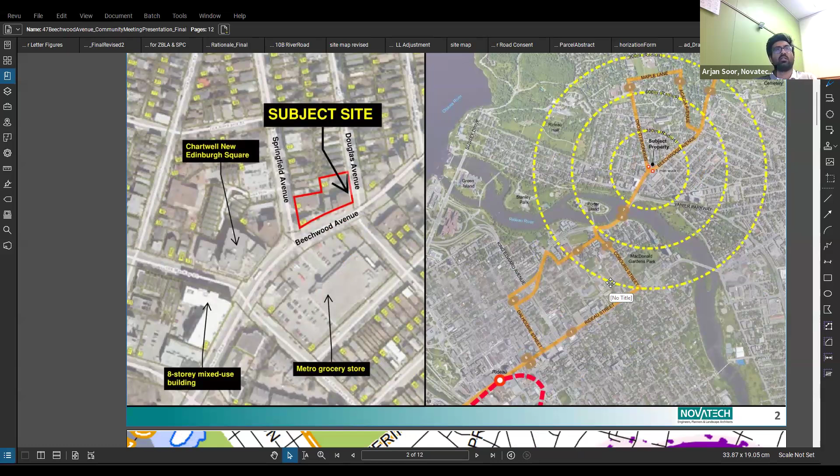To give a bit of context, the subject site is located on the north side of Beechwood Avenue, across the street from the Metro grocery store, and east of another 8-story mixed-use building on the north side of Beechwood. The subject site is currently developed with 6 different businesses, and the map shows nearby uses on the left-hand side, and the proximity of public transit service with 300, 600, and 900 meter radii on the right-hand side.

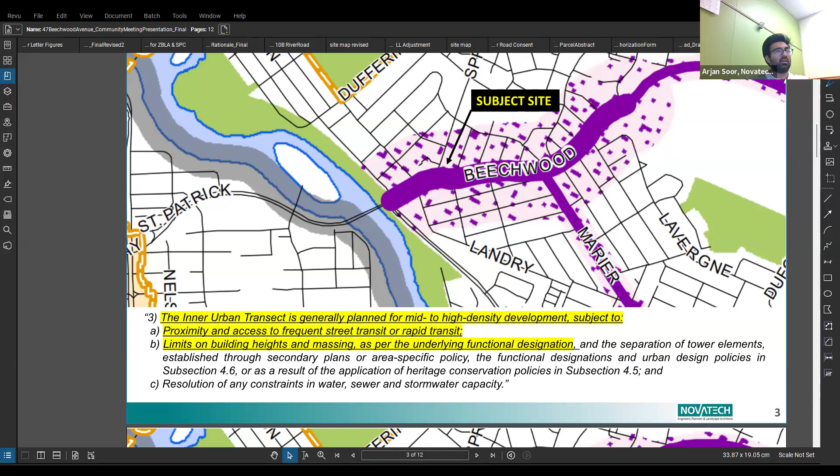The subject site is within the inner urban transect. The intended pattern of built form, site design and mix of uses in the inner urban transect is urban. Section 5.2.1, policy 3 of the official plan states that the inner urban transect is generally planned for mid to high density development, subject to proximity and access to frequent street transit or rapid transit, and limits on building heights and massing as per the underlying functional designation. The subject site is located close to frequent transit service, and the underlying designation is Main Street Corridor, which we'll discuss next.

Touching on what the official plan identifies as urban characteristics: Section 5, Table 6 identifies things like shallow front yard setbacks, principal entrances at grade with a direct relationship to the public realm, a minimum of 2 stories, buildings with minimal side yard setbacks, small formal areas of landscape including soft landscape, trees, and hard surfacing, and limited parking concealed from the street. The proposed development, as you'll see in Ryan Coolwine's presentation, exhibits many of these urban characteristics.

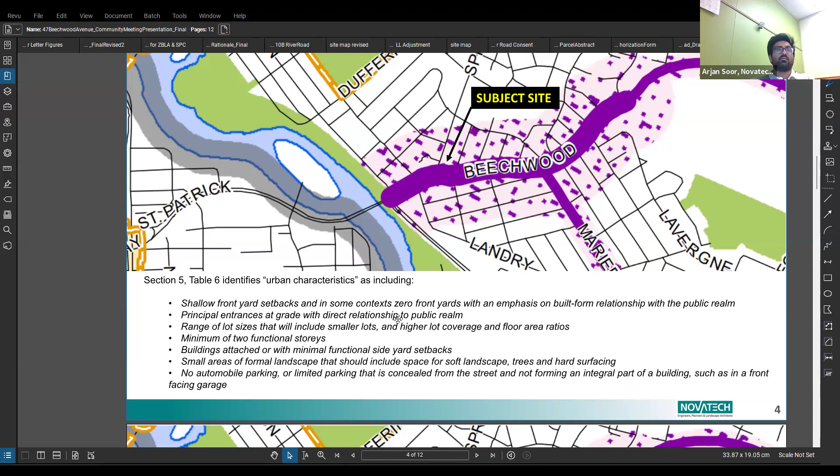The subject site is designated Main Street Corridor within the inner urban transect. Main Street corridors within the inner urban transect are areas where increased residential growth and mixed-use development is to be accommodated. Section 5.2.3, Policy 2 of the official plan states that along main streets, permitted building heights, subject to appropriate height transition, stepbacks, and angular planes, are: on sites fronting segments of streets whose right-of-way is narrower than 30 meters, generally up to 9 stories, except where a secondary plan or area-specific policy identifies different heights.

The subject site is along a portion of Beechwood that is designated Main Street corridor. The Beechwood Avenue right-of-way is less than 30 meters in width, meaning a building height of up to 9 stories is generally permitted. The proposed development of an 8-story mixed-use building clearly aligns with this direction in the official plan.

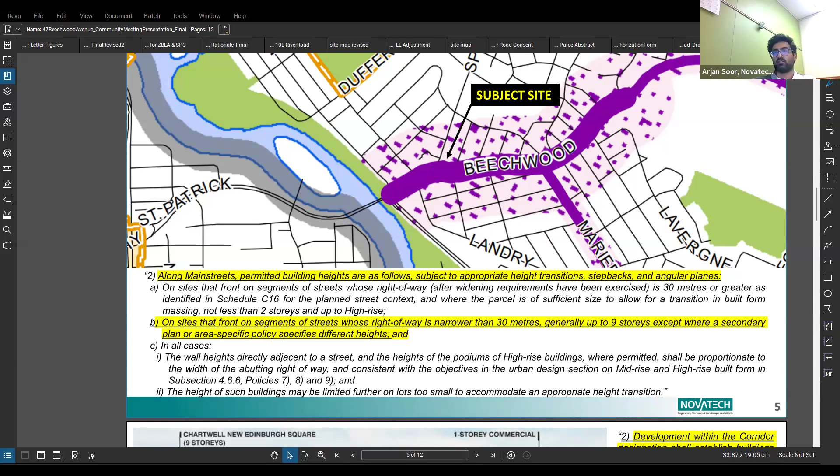The subject site, as mentioned, is designated Main Street corridor, which permits up to 9 stories. Section 6.2.1, policy 2 of the official plan states that development within a corridor designation shall establish the maximum permitted building heights and highest densities closest to the corridor, and that appropriate transitions in height, use of land, site design, and development character through the site where the corridor designation meets abutting designations shall be ensured.

Section 6.2.1, policy 3 of the official plan states that corridors will generally permit residential uses and non-residential uses that integrate with a dense mixed-use urban environment. As Ryan Coolwine will explain in his presentation, this development provides a transition between the taller buildings to the west and low-rise buildings to the east along Beechwood Avenue. An adequate transition is also provided from the properties to the north, which are subject to the evolving neighborhoods overlay.

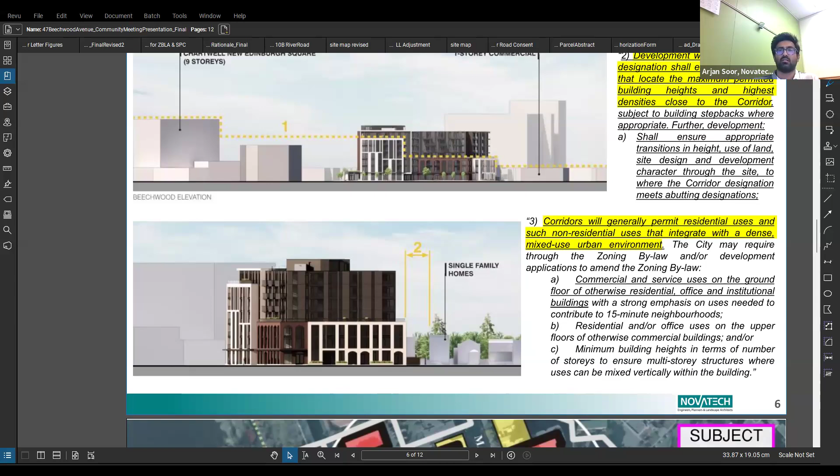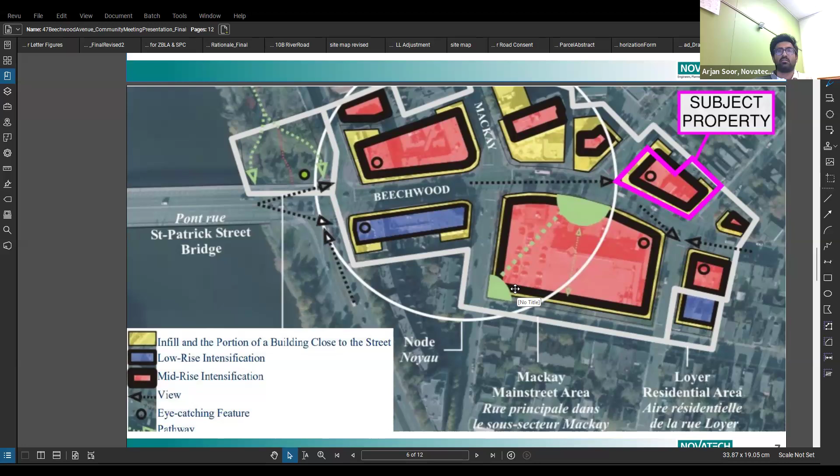What I want to emphasize is that the project conforms to the official plan and is designed to align with the policy context I've set out for the subject site. The property is designated Main Street corridor within the inner urban transect. The official plan anticipates the site would be developed with a mixed-use mid-rise building of up to 9 stories exhibiting urban characteristics. As Ryan's presentation will demonstrate, that is exactly what the proposed development does, aligning with the policy direction of the official plan.

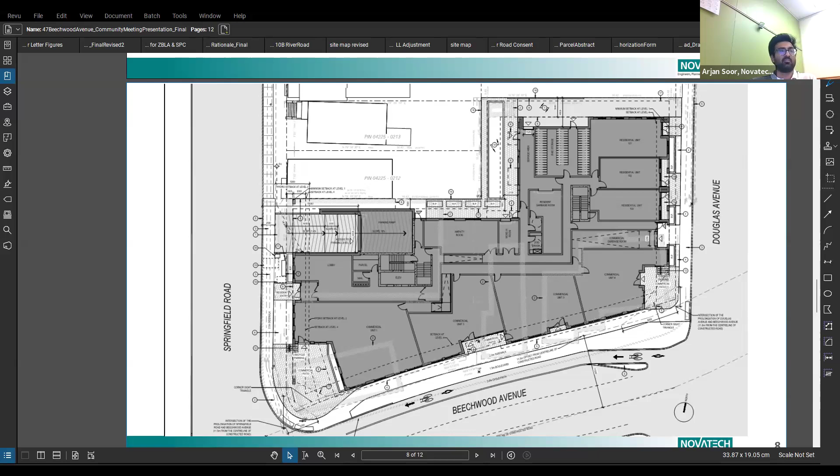So I want to pass it on to Ryan now, so I'll stop sharing.

All right, my turn. Can everybody see my screen okay? I don't see anything. Now? It's loading, but yeah, there you go. Okay, awesome. Thank you for that, Arjan.

There's a great deal of complexity with this site, and this is a project we were very excited to work on. There's a culmination of intersections and different levels of complexity that come together with a project. Basically, everything that could be complex is complex with this project, and we check every box possible. We like difficult challenges, so this really resonates with us.

We do a lot of infill work and we're specialists with multi-unit residential. We believe deeply in the positive influence that design can have, not only on the people who live in these projects, but also the surrounding communities, and we take this responsibility very seriously as design professionals. This project is of particular relevance to me because I'm actually a resident of the ward, a Manor Park resident, so I know this neighborhood very well.

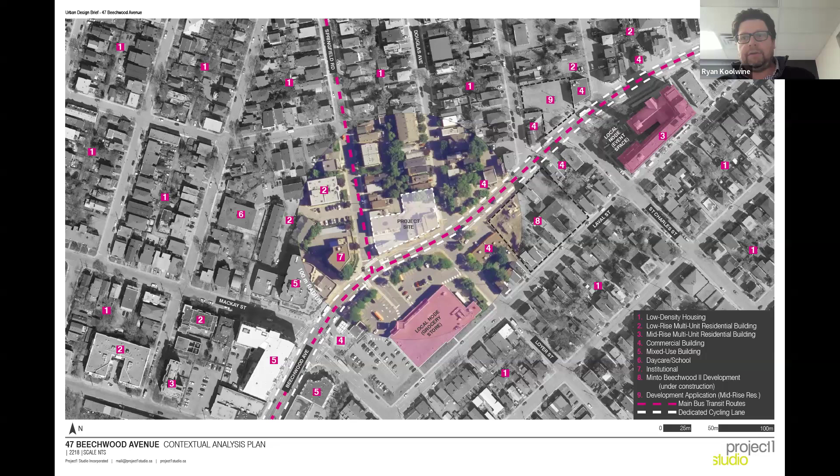When we look at the site, we see the number of recent developments that have been completed: St. Charles Market, 88 Beechwood that's recently been completed, Claridge's project that may happen at some point, and we've already completed a low-rise building at 4 Champlain. We're well aware of the trend, the energy, and the momentum being built for the neighborhood, so having the opportunity to work on this site was extremely interesting for us.

We do need to take stock of what's there right now. The positives are that we have thriving businesses that contribute quite nicely to the community, but they're housed in structures nearing the end of their functional life cycle. While the presence of what they offer as an asset to the community is great, what they do in terms of urban design and the public realm is actually quite detrimental to the neighborhood. Buildings set very close to corners aren't about pedestrians or circulation space and can't be celebrated, but are about negotiating very tight corners that have safety concerns.

When we look at the existing storefronts that we've got, these are stairs and buildings that are in various states of repair, that are inaccessible. We've got ceiling heights in these businesses that are quite a bit below what we would consider optimal, very much suboptimal. And the general characteristic of these gaps in between buildings is surface parking.

These aren't really directed towards pedestrian use. And while I do make note of a number of these businesses making use of surface parking areas to provide outdoor space, that's a cue that we've used towards how we move forward with the project.

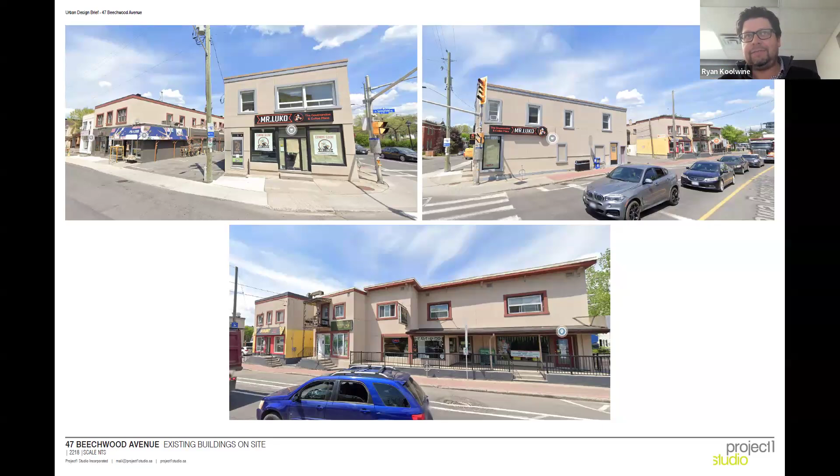But the general sense that we get as we walk past these buildings and past this part of the neighborhood is buildings that are certainly past their foreseeable lifespan, and then surrounded by areas of asphalt that aren't really geared towards engagement or the pedestrian realm.

So there is not a single building of these commercial residents that face Springfield and face Beechwood that actually meet any of the code requirements for being barrier-free accessible. And while the building on the corner here does have a ramp, that ramp is far too steep to be considered barrier-free or to providing proper barrier-free access.

And so this is another pretty big challenge here in terms of the commercial space that is being offered, is that it's being offered to the able-bodied and able-bodied alone, which isn't necessarily fair to the community at large.

The remainder of the site, as we've seen here, is occupied by surface asphalt. So these are all surface parking areas. And yes, they've been reclaimed in certain spots to act as patios, but the general nature of these areas is surface parking. And then we've got these gaps in our urban blocks, which is, again, something that we're looking to avoid when we're dealing with important areas of our streetscapes.

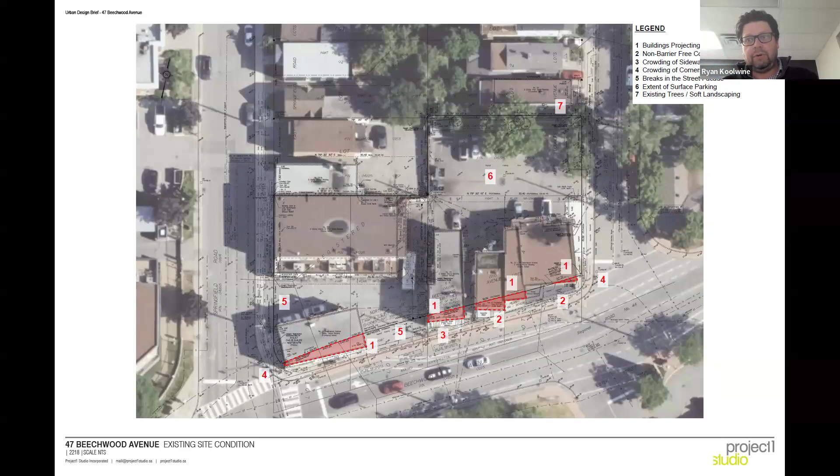There is a small area of green space at the northern boundary of the site along Douglas, and then a small portion that comes down along Douglas with a couple of trees on it. We certainly respect this, and definitely part of our plan going forward was to promote and to bring more green space into the development.

So when we analyze the site and we try to figure out what key elements are currently in the context and what elements we'd like to bring forward, it really relates to understanding the site and bringing out a bunch of ideas. So immediately we identify areas.

This is a corner that needs to be celebrated. This is a corner that needs to be given back, and we need to have some public space in this area. We really do like the cadence of the buildings that we have here.

So it's important to us too that when we're articulating the ground plan and articulating the buildings that are along Beechwood, this isn't a monolithic building. This has to be a building that has different facets, that has bumps, outs and ins, so that it kind of mimics or harkens back to the idea of a neighborhood that was comprised of a series of smaller buildings as opposed to one gigantic building that's going to be occupying the entire city block.

Also important to us here too is the connection and establishment of really well-connected cycle tracks and active modes of transportation. We have worked at length with city staff on the active modes of transportation in front of this site and trying to determine a number of different ways to get cycle tracks to be integrated into the site and work with current and constantly evolving design standards.

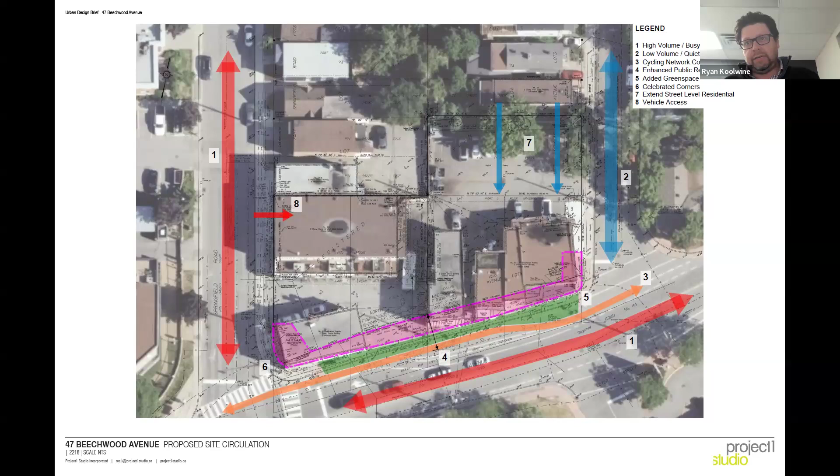When we look at the difference between these two streets, close in proximity, the character of Douglas is distinctly different from Springfield. We see businesses, commercial space, building entrances, and vehicular entrance along Springfield, whereas on Douglas it's much more about bringing residential units down to grade, with doors to the street and porches in front.

So when we look at the site plan we've developed, we can see an integrated cycle track, a green buffer in front, and street trees planted in front of the building. One of the most important parts of this project, in my mind, is the plaza we're offering.

This is area that would otherwise have been developable, but we're pulling the building away from the corner to offer a valuable piece of outdoor public space, patio space, and opportunities for interaction. Understanding this is a busy intersection, we've added an extension - you'll see this in the rendering - an archway extending from the building to provide a buffer, improving separation and privacy and making the space more comfortable for people to sit and actually use.

We don't like to design public spaces and open spaces if they're not going to be used - those are worse than not providing them at all. So we need to not only allow for them to exist, but design them in a way that's comfortable for people to sit down and actually want to use these spaces.

Then we've got four commercial units facing Beechwood Avenue, each with outdoor space, so there are always these pauses - areas where the building runs tight to the sidewalk edge, and areas of pause where it pulls back, giving us plazas on both corners. We have ground-oriented units here, and on the other side of the building is the main entrance, as well as the entrance into the underground parking.

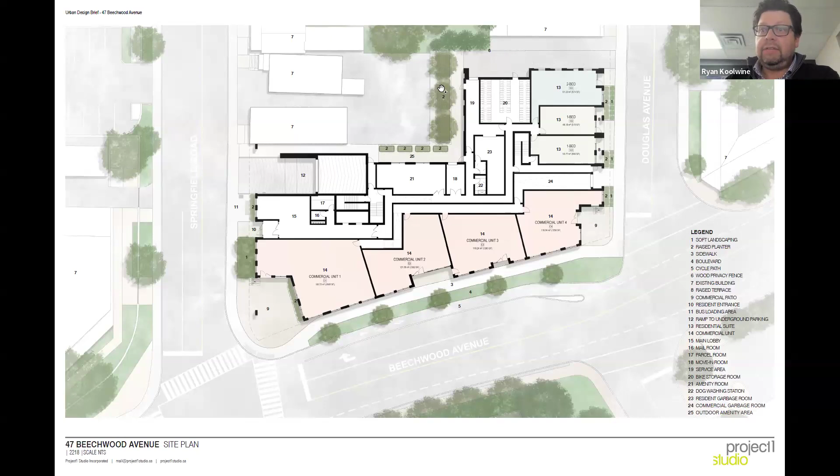Around the inside corner is where we'd find outdoor amenity space, an amenity lounge, with raised planters and a planting bed. We're actually designing the planting bed with enough soil volume to support the planting of trees.

So if we look at a comparison between where we are currently - with surface parking, buildings projecting beyond property lines, no green space in front, no street trees - versus the proposed development with this green space, the raised and separated bicycle track, these public areas at the corners, and landscape treatment around the property lines, we get a clear idea that the principles we looked at when we first started are being well integrated into the design of the building.

The mention of trees was something that was hard to ignore with some of the comments that we got back. So yes, there are going to be 9 trees that are lost. They're mainly along this north property line on the Douglas frontage, or on the Douglas address, so the north property line around here.

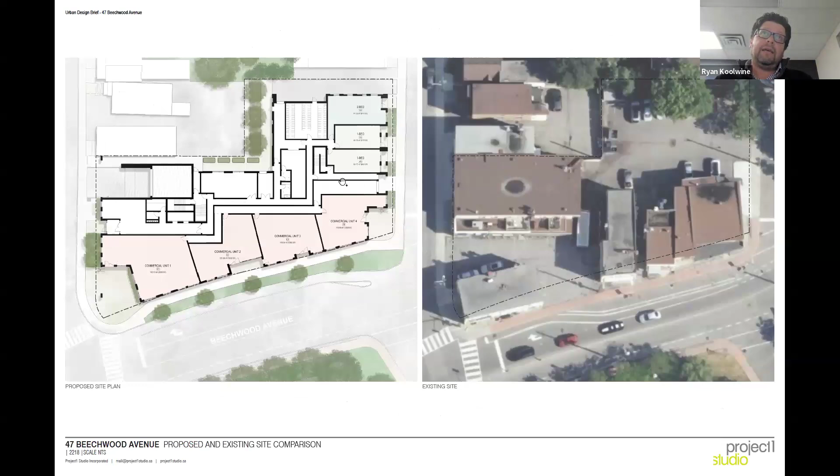I'm blowing up this plan in particular to show the extent of planting, both in front of the units along Douglas, the 4 trees we have planned along Beechwood, and the fact that the area between the cycle track and the sidewalk is intended to be soft landscaping, so sod or some other type of ground cover. There will be 2 trees along Springfield by the entrance of the building, and 3 trees in the rear area in a raised planting bed with any number of other plants going into these raised beds.

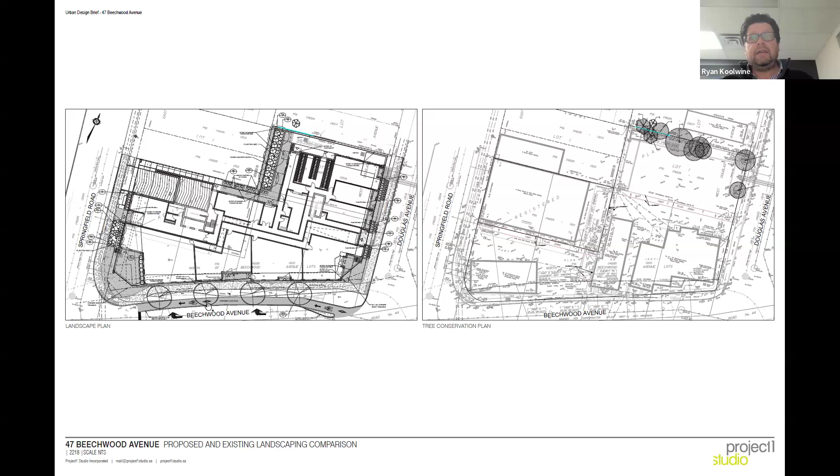The approach here is very much about increasing, to a large degree, the amount of planting and vegetation we see around the building, especially in comparison to the current condition. As a compare and contrast, we can see that we've got these 9 trees being lost, and we're replacing them with 9 trees, but in far more prominent locations that give back to the project and to the community as well.

The other comment we heard was about retail space, and I want to be clear on this as well. While it's easy to compare number of units to number of units, I don't know that this is necessarily the best way to look at the before and after from a commercial perspective. While there may have been more units in the current condition, we'd be looking at spaces that aren't optimal, and ceiling heights that are suboptimal for commercial uses.

As we mentioned before, none of these spaces are barrier-free accessible. The other element is that none of them really house their own waste, so this results in garbages stored in the surface parking area, open to the elements and visible. The solution we've got with this design is that all of these units are accessible.

All of these units have over 11.5 feet clear, and we're looking to increase that if we can. All of these units would have access to a common corridor leading to the storage of waste inside the building in cooled environments, so there's no impact on the neighborhood, no pest problems, none of the other problems that happen with having waste stored outside. We're very mindful of this.

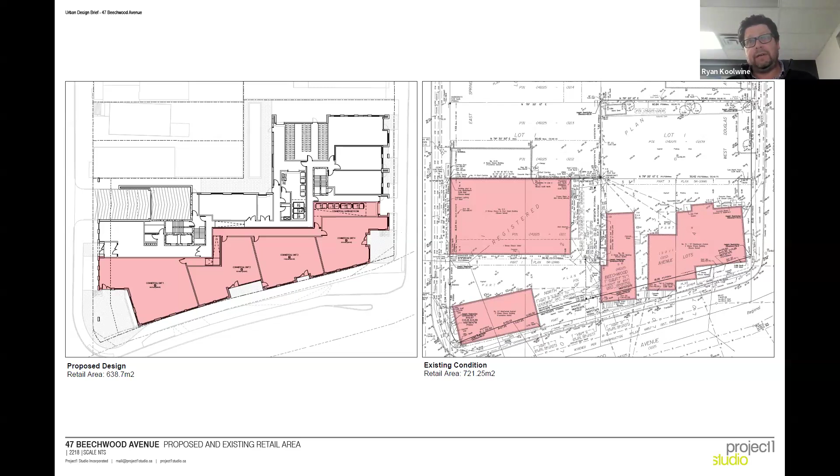The net difference in terms of the retail space we're actually offering is less than 1,000 square feet. We're at 638 square meters in the proposal, whereas the current space being allocated is 721. So we're not a million miles apart in terms of the amount of retail space being offered here.

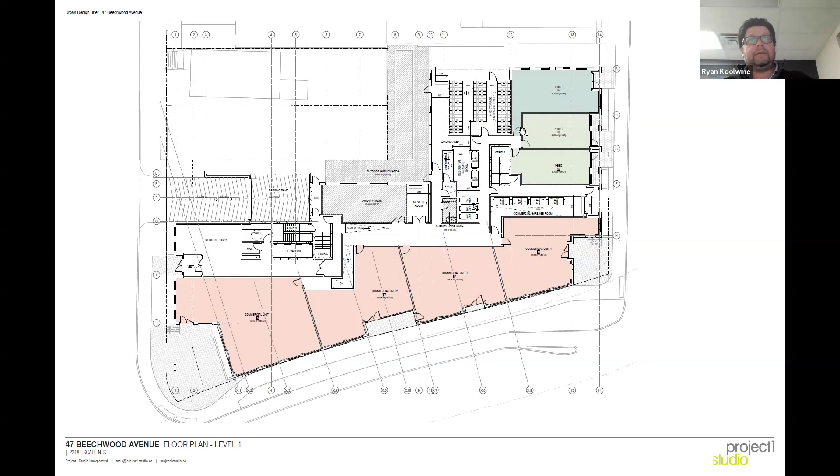These are the floor plans. I'm going to flip through these relatively quickly since they're less impactful to everything we're talking about. There are 41 parking spaces below grade, and no parking at grade, so any parking space here is underground and hidden from view. We've talked about the ground floor use: resident lobby, garbage rooms, bike storage room at grade, and residential units facing Douglas and the commercial units.

Then we climb up the building. There is an amenity space and an amenity room. We were careful to locate this along Springfield and not along Douglas, so that the residents at Douglas would not have people standing on terraces looking over their rear yards into their private space. This is oriented towards Springfield intentionally, as a more public area, serving to activate the street frontage as opposed to taking away from a resident's privacy in their rear yard.

As we climb up from there, the building tapers in and continues to taper in as we climb higher and higher. Before we get to level 7 - this is called an 8-story building, but we're really a 7-story building. We have a small pocket that goes up to 8 floors.

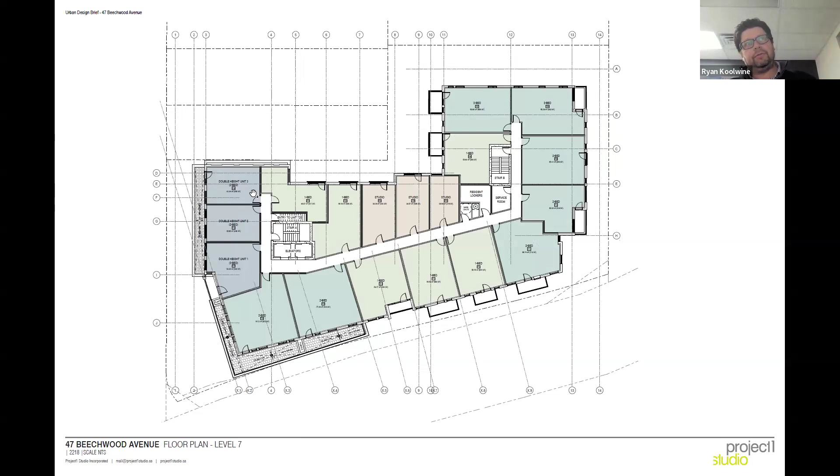The only way we're doing that is by making a few units right in the top corner here 2-story units. The reason we have to do that is because of the NCC view sheds - there are protected views from the National Cemetery looking towards Parliament Hill, from 2 points. We've been extremely careful with how we plan this building to meet all the height restrictions. So this area of the building is able to pop up, but the elevators cannot, and we need to provide elevator access to every floor of the building.

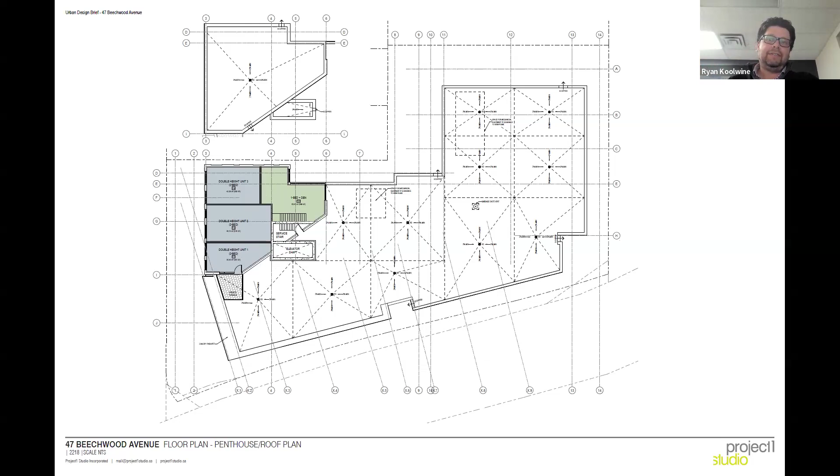So the only way that we're able to use this space is to make these units two stories and have a stair inside a suite to get up to that height. But this is kind of the overarching standard that we need to meet.

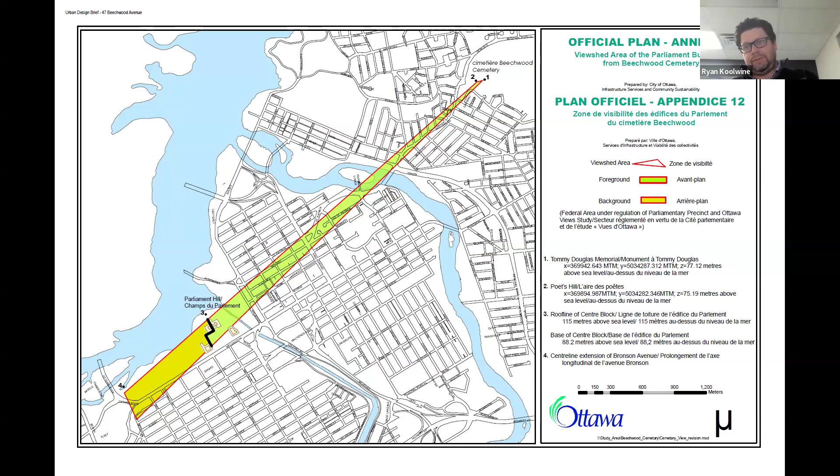There are two points in the National Cemetery that have protected view sheds to the base of Parliament Hill, so we've engaged our surveyor to plot these points. They're far more precise than we're able to be, and we can't get this wrong. We had them provide a very detailed grid of elevation points, topographic elevations, which we brought into our modeling software to create view cones or planes to ensure we don't exceed any of these height restrictions.

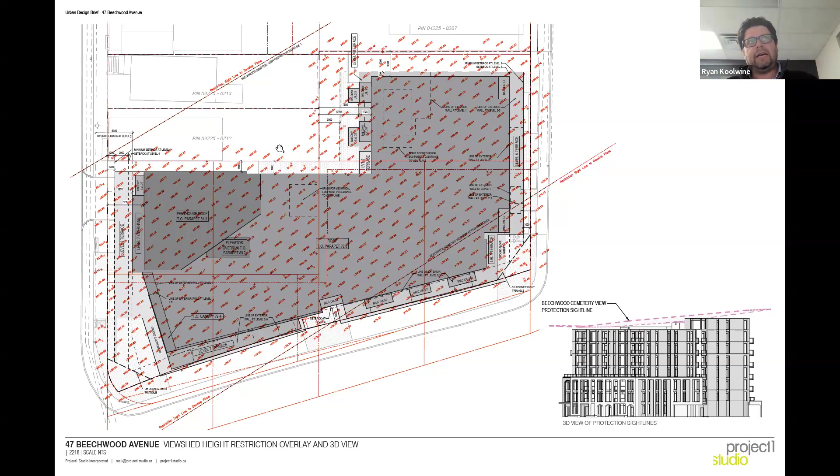It's hard to map this because it's not just a flat plane, it's actually kind of a V shape, like an open book where the spine is lower, because why make it simple? So we have to work through this in a very particular, precise way. I can speak confidently that we have stamped surveyor's drawings authenticating the height requirement on the site, and that we meet all of these height requirements.

In terms of the articulation and mass of the building, this is an aerial view that's a composite of what's existing currently. We've modeled 88 Beechwood to give an impression of height, and then of course the subject property right here and our proposed design for the project.

What we want to notice here is that this is a really busy building from a visual perspective compared to how we typically design buildings, because we didn't want this to feel like one building. Faces of buildings don't even line up—this white element here is not perpendicular to this brick element here. That's intentional, referencing the history of the buildings that sit on site, none of which really look super square when built. We're trying to make this building feel like a collage of different projects coming together, as opposed to one gigantic structure inserted on site.

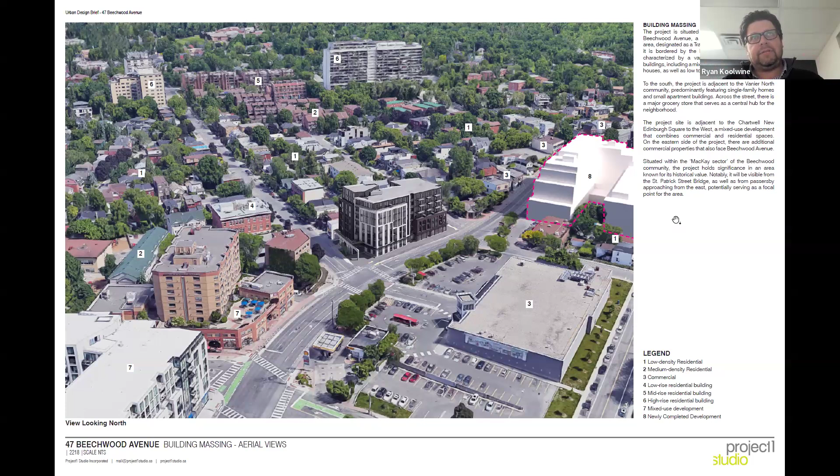We're being particular with the way we're treating brick detailing, archways, soldier courses—really difficult masonry detailing to execute properly, but we feel it's very important to making sure it reads and references the character of the neighborhood.

We set that against things that are very smooth and modern, intended to create a juxtaposition between the two. It's important that we build buildings of our time, and that we reference the history of the site and context, but they can't just be nostalgia pieces trying to recreate the past, because that's disingenuous. We're trying to live somewhere in between—making comments to the future, being respectful of where we are now, and remembering where we were before.

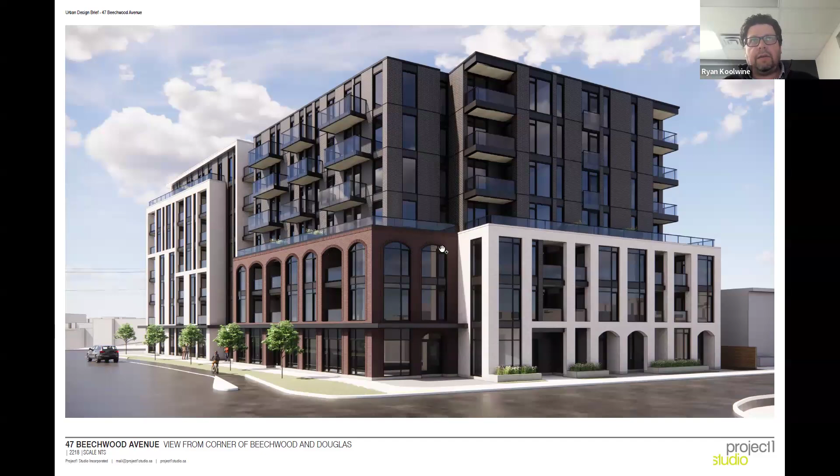When we look at the building from the other side, at Douglas looking down Beechwood, we can see that whereas in the one corner we had this white stone element with really clean lines, we've now got archways with soldier courses on top of the arch, and soldier courses on top of this mass. Again, we're trying to make more traditional references here with the way we're treating the building.

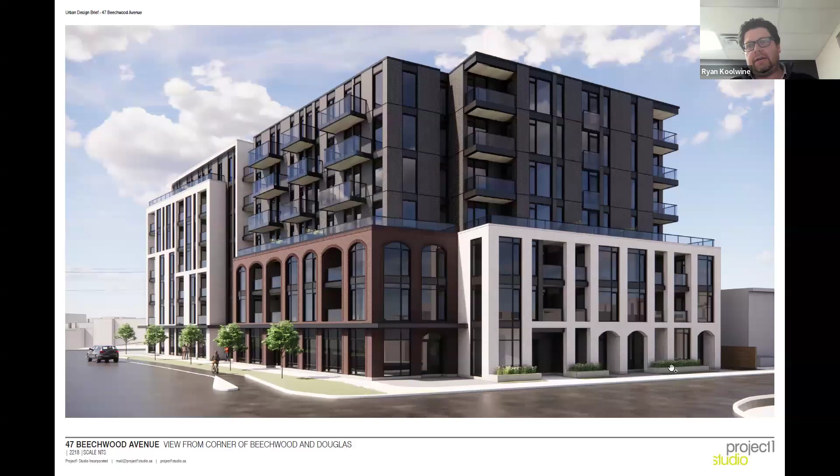And then as we turn the corner and go back into a residential use, we're switching materials again to say this is something different, this isn't commercial use anymore. We're using archways as a device to say these are entrance points to the building, entrance points for people's suites, and offering planters and breaks to provide some privacy for people on their front porches.

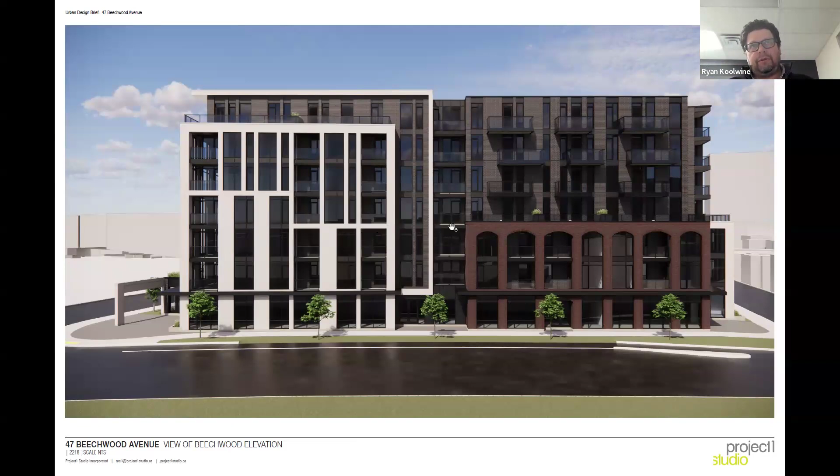So again, this is the elevation along Beechwood. We're talking about the differences in mass, the differences in architectural treatment, the modern versus the more traditional aesthetic, and the fact that we pull these apart so they really start to feel like a series of component parts that are being stitched together.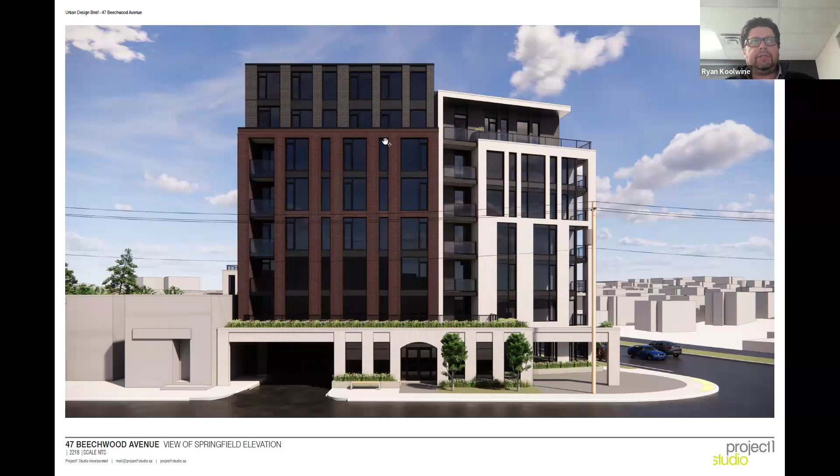And this is the view along Springfield. We can see this band that extends out into the archway here. What we've done is actually set the overhead door to the underground parking back, because we don't want that to be part of the elevation. We want all of this set back so what you read is this beautiful stonework, this terrace that we've got on the second floor. Again, much more traditional lines than what our firm would typically do, trying to make reference to the area the project is located in.

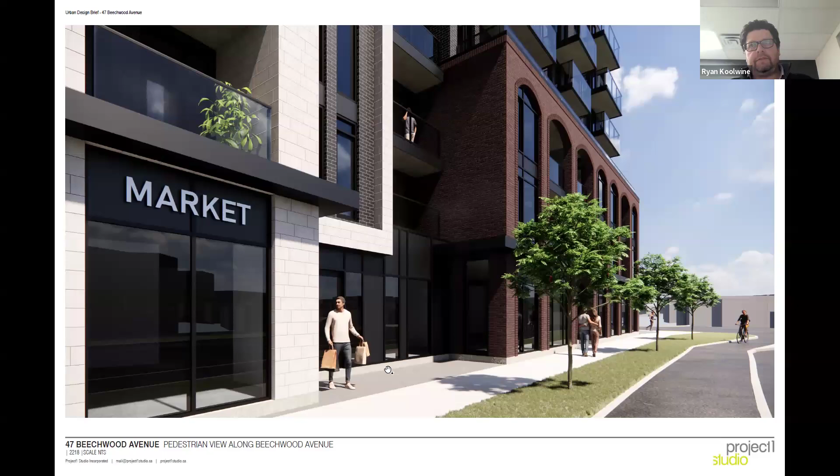And here's a street level render of how this plaza on the corner could be developed, how engaging it could be, and how we're working with all the infrastructure for cycling and sidewalks. Here's a street level render looking halfway down the block, showing that smaller plaza we've got at mid-span, how we might be able to purpose these storefronts, and street trees in front of the building.

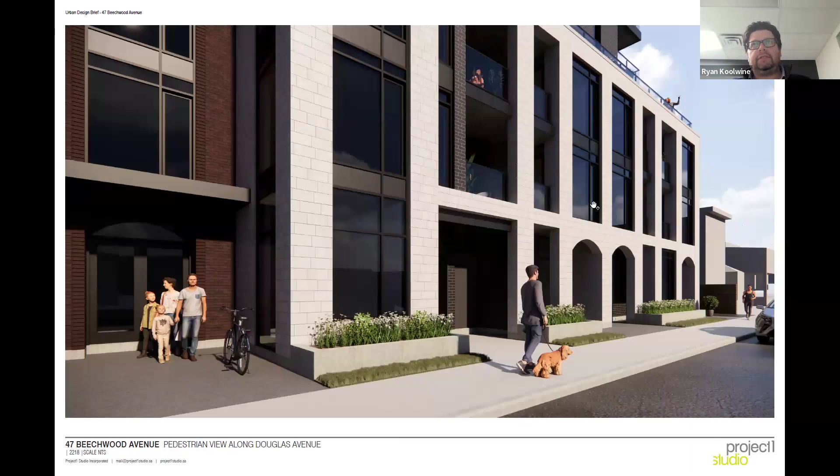This is at the corner again, at Douglas and Beechwood, and we can see this transition between commercial use and residential use. Then looking more down Douglas, we see the edge of the commercial leading into these at-grade units that would have a door to the street. Two more slides, then I'll stop, I promise.

So this is similar to what Arjan was talking about, our method for managing transition of height and using the mass of the building to step in different areas, helping step the building up and manage low-rise versus high-rise contexts on either side of the site. I think it's important that buildings don't all have the same height, that we play around with height and step of the building from project to project and block to block, because that's what makes cities cities and not suburbs.

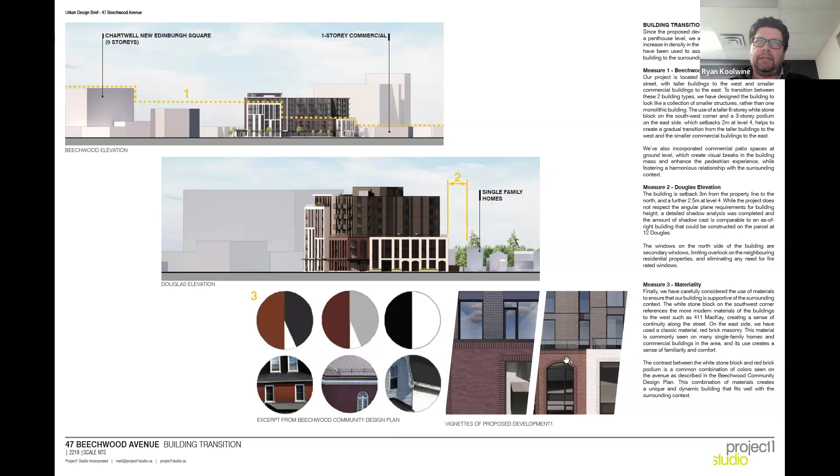And then looking at color palettes as well, color palettes of existing buildings in the neighborhood and how we can apply those same colors into the project. That's really been a basis for the project as well, understanding that materiality and applying it to the project.

And then I'll just leave here with these 3 vignettes. They speak to the level of detail, the level of articulation, level of massing that we've really spent a lot of time considering and perfecting, because we feel like it shows that we're not considering this to be a standard multi-unit residential building. This building is very much of its place, very much of its time, and couldn't be built anywhere else. Thank you.

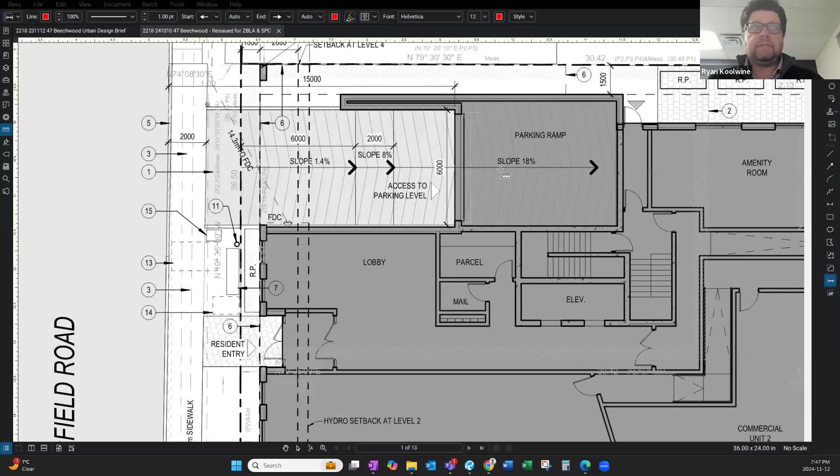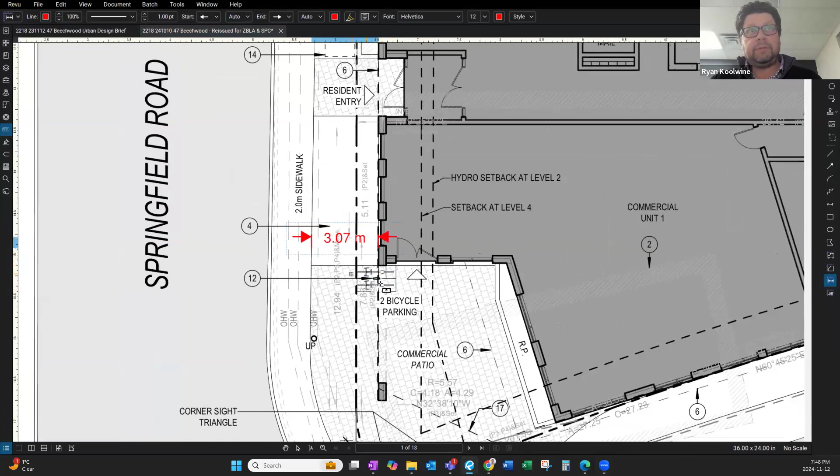Instead of the documents we presented, this is the actual site plan with measurements on it. The sidewalk along Springfield is 2 meters wide, and the area between the sidewalk and the edge of the building is 3 meters - the better part of 10 feet. We're showing 2 bicycle parking spots, visitor bike parking spaces on the corner. They have to be on our property and not on city property, which is why they're located here. We're able to provide everything shown in the rendering based on these dimensions - a 2-meter wide sidewalk, about 6 feet 4 inches, and another 10 feet from there to the edge of the building, with some visitor bike parking shown. This might move as we refine the design, but this area is critical from our perspective - we're offering it back as patio space, a space for encounter and interaction, very much a community space.

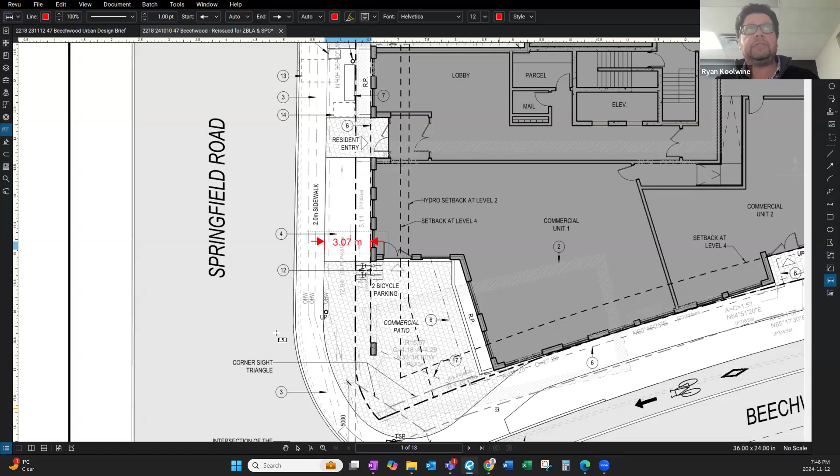Thank you for that response. I think the next hand that's raised is Peter's.

Hello, thank you for this. Appreciate the opportunity to provide my views, shared with a number of people I know who live in that area. We've lived here since about 1985. A previous councillor wanted to increase the number of bike lanes, which was the popular wish at the time by many bikers, and the result was that the road got jammed and they had to change that. We've got to have space for cars, pedestrians, and bicycles need to go in another area to get around it. My concern with parking is there's very little parking to help people going to that building or the restaurants in it for eating, and I wonder if you could explain that.

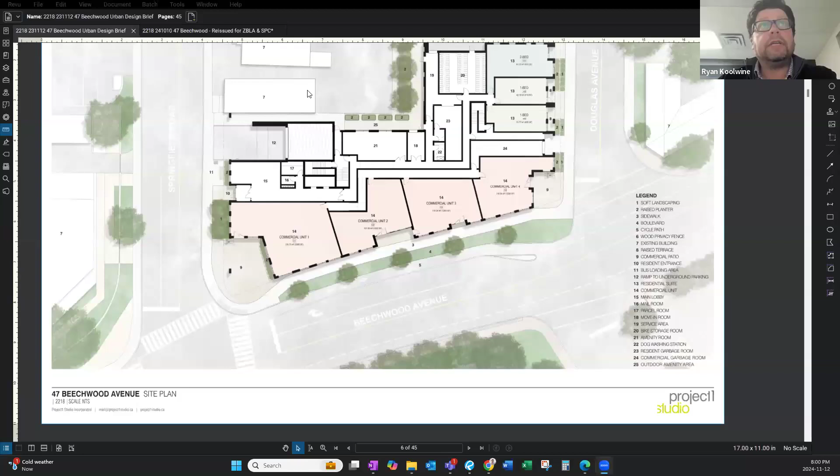On the first question about the size of the rental units—for sure, we cut these things up just as a graphic and illustrative point. Depending on market desire and market demand, we can certainly make these units smaller, or we might amalgamate to make them bigger. You never know. It's early days for doing something like that; the idea is just to illustrate what's potential or possible here, and then we let market factors decide the final size of these things.

Certainly hear the general comment about concerns over affordability of these commercial units. There's enough in the chat talking about opportunities and models involving subsidy, but that's really not a sustainable game when we're trying to properly lease out these spaces. To be honest, we deal with a number of multi-unit residential projects, and there are a lot on the shelf because financially they don't make sense to move forward with. The days of developers coming in and turning over ridiculous profits doesn't happen in this current financial reality. A lot of these are market-driven decisions, and thinking subsidies will get us there only lasts for a certain period before they run out.

What does happen, though, is that I've also worked with tenants that are looking at assessing which sites to move into, and the market conditions, the number of residents, the number of units, the demographics that surround particular areas weigh in very heavily to where people decide to move. So the net benefit to having these developments happen - I'm not specifically talking about this one, but seeing 88 Beechwood come online, seeing some of the other ones that have been planned come online - is that it creates a swell of demand, and that's certainly going to be the biggest factor that helps get these commercial units rented out.

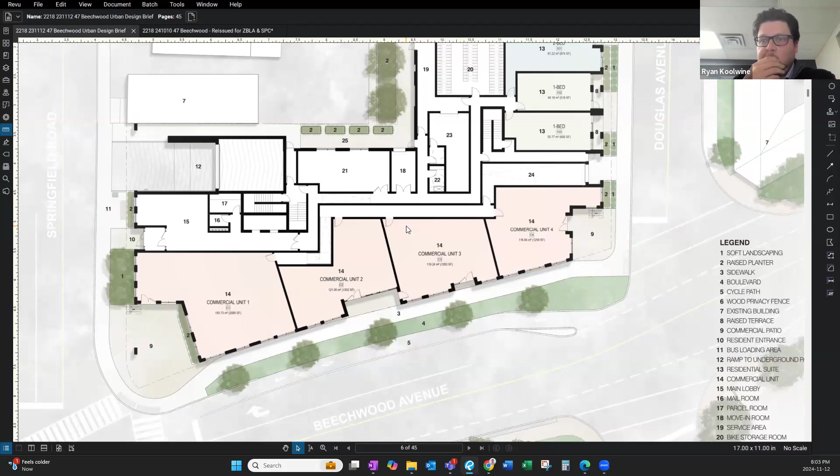Thank you so much for that answer. And I want to thank everybody for taking a good chunk of their evening out to participate in this information session. I thought it was very important that we hear from you, our residents.

Like I said before, we have been hearing from other community associations and organizations, but it's also important that we give an opportunity for you to provide inputs on this development. There was a lot of interest, so we thought it would be very important to take advantage of the option that councillors have to hold an information session on this file.

We are going to continue to take input from you. So please feel free to reach out to my office with specific comments or concerns. You can do that by sending an email to rito.rockcliffeward@ottawa.ca. Please also feel free to reach out to planning staff, who are still collecting input from the public on this file. We appreciate the time you have taken to be with us. After we collect all of the data, I will ensure that my views and final comments are known to the community on this file.